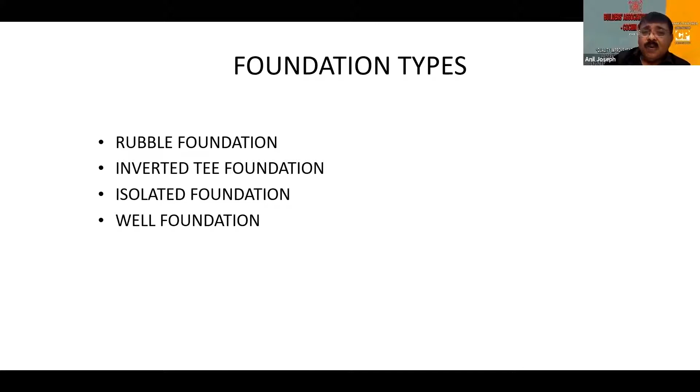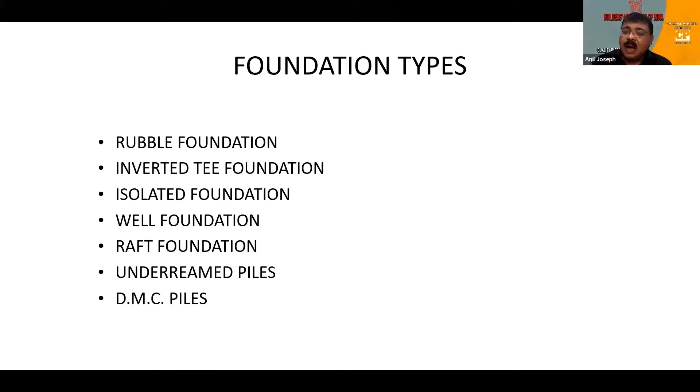As young engineers, you should understand that cost is a very important factor once you come to field practice. So this is isolated foundation, then we can have well foundation, raft foundation, underream piles, DMC piles. For a building there are different options - it can be for a single story building, a 20-story building, or a 40-story building. What foundation is needed? As an engineer, we should have an idea. We should not go into detailed aspects, but we should understand that for this building, in this area, what should be the foundation and what will be the approximate cost. That is an important aspect you should know.

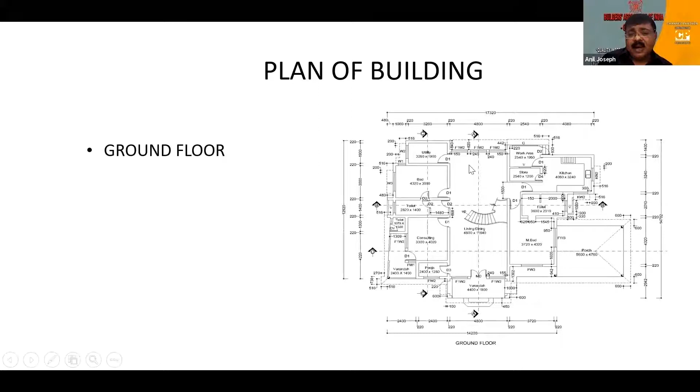So I'm taking a typical project, a small building. This is the ground floor plan, about 1,500 square feet, and a first floor plan, again 1,500 square feet area. So this is the building. In this exercise, what we are going to do is take this building into different soil conditions, with all other factors remaining the same, and understand the impact of the type of soil on the cost of the building, because it's a very important aspect.

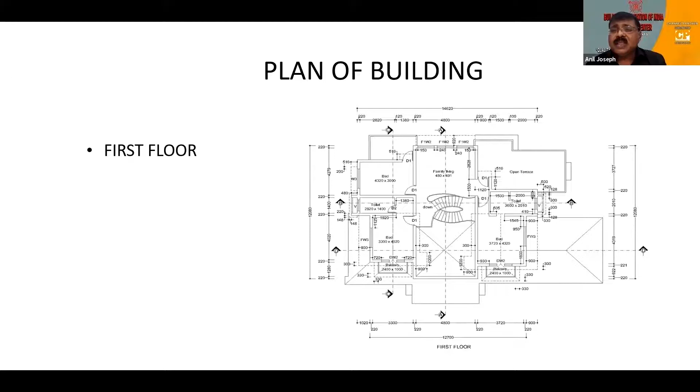Tomorrow, a client comes to you and asks what the cost will be. You should have an approximate idea of what the cost is going to be. This presentation was done quite some time back, so we might have to change the numbers a bit.

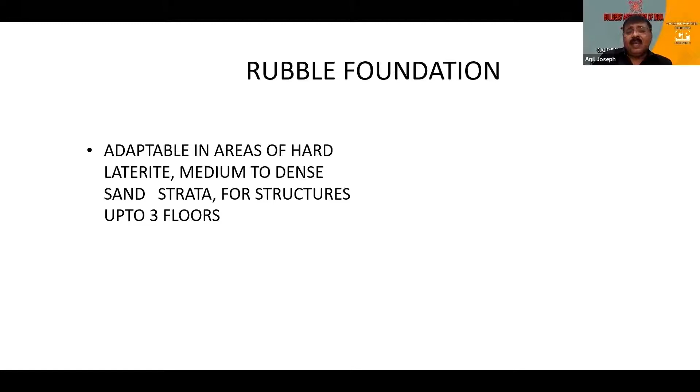Now, the common foundation we are adopting is the rubble foundation. Most of you know there are laterite foundations as well as rubble foundations. Generally, for conventional load bearing walls up to 3 floors, you can go for this system, provided you have hard laterite soil or medium to dense sand strata.

Up to 3 floors you can go for that, and you have a PCC at the bottom, and the width of the rubble at the lower level reduces as we go up, which is the minimum required for load transference. I can tell you the concept, because this 60 centimeter relates to your bearing capacity value.

Suppose for a 2-story building, you should have a rough idea: it will be approximately 6 ton per running meter as the bearing capacity needed. That will be the load coming from the foundation, the wall load, and the slab load, plus the first floor load and slab load. So approximately 6 ton per meter will be the running load coming from a 2-story building, so you should have a bearing capacity of 10 ton per meter square or higher.

You can go for rubble foundation. When you get hard laterite, you get a bearing capacity ranging from 15 to 25 ton per meter square. If you have dense sand with SPT greater than 20, you get this bearing capacity. So this is the criteria when you get a soil investigation report.

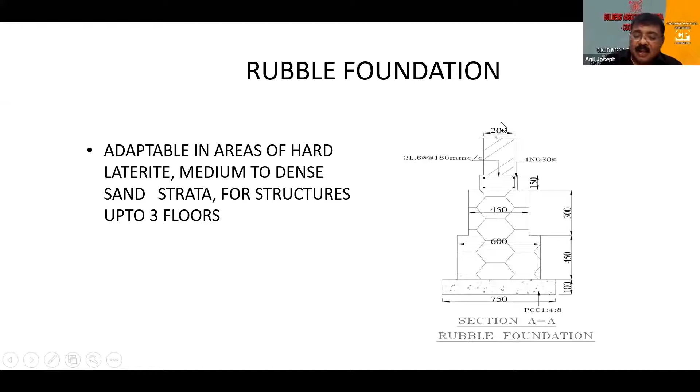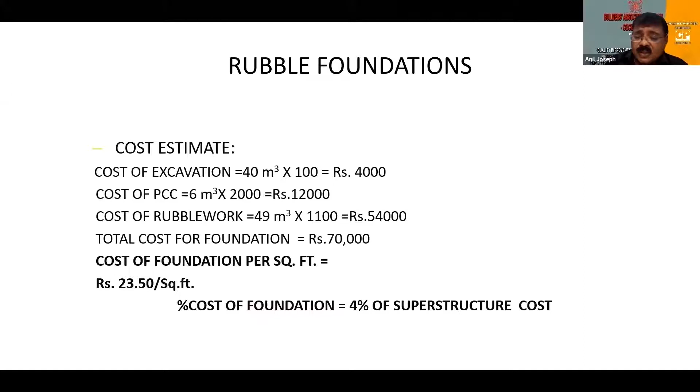So this is the simplest foundation, and what is the cost? Approximate cost of this building - suppose the cost of foundation includes excavation cost, PCC cost, rubble work cost, and the total will be approximately 70,000, which is about 23.50 rupees per square feet, or 4% of the superstructure cost. The superstructure cost remains the same. So if you have a very good strata, your foundation cost will be only 4% of the superstructure cost.

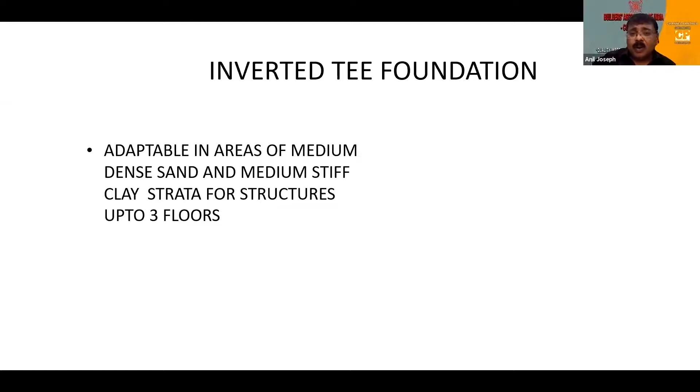Now the second option is that you are not very sure, the values are a bit lower, then you can go for an inverted T foundation, because small gaps can also be bypassed. It is adaptable for medium dense sand strata, medium stiff clay strata, and for structures up to 3 floors. We call it wall foundation because the load gets transferred directly into the soil beneath and dissipated in the entire area. So it is advisable when you are not sure of the soil type below - either rubble or inverted T foundation.

Nowadays we find very few skilled laborers to do rubble foundation, so in most cases we go for inverted T foundation. You can see a 75 centimeter width slab, and a beam will be inverted on top of that. Over that, rubble work will be done and a belt will be provided. A DPC layer will be provided on top to prevent dampness from getting into the wall - a very common problem seen in many houses, including your own.

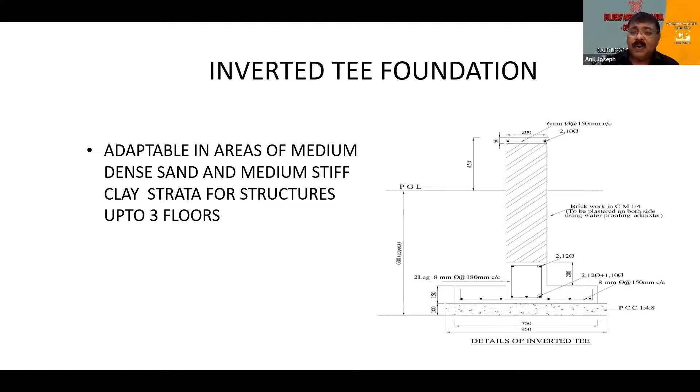If you have a close look, you can see that on the ground floor, the peeling of paint happens because dampness shifts from the ground level due to capillary action and gets into the wall. That is why we need a DPC layer to prevent that. This can be done up to a 3-floor building.

The cost for this will be approximately 10% of the superstructure cost. We worked out the superstructure cost at 600 rupees at that time; now it might be about 900 to 1,000 rupees per square feet for constructing the building. So you might have to spend about 100 rupees per square feet for an inverted T foundation at the current market rate - earlier, on 600, it was 56 rupees per square feet in the detailed working.

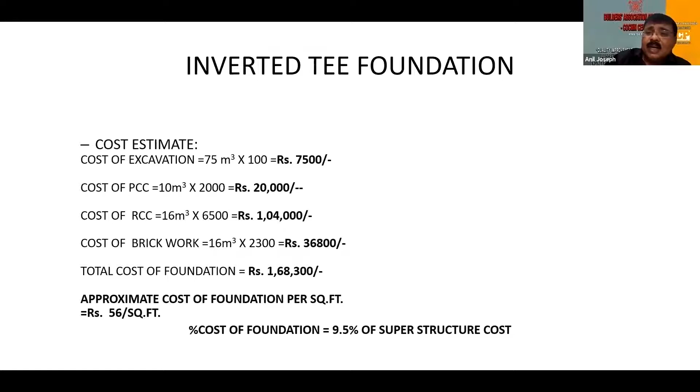The idea of this concept is that you should know, if you are going for this foundation or that foundation, what the cost is going to be. And again, the decision has to be based on the type of soil present in that particular area.

Now coming to isolated foundation - suppose we don't have good soil on top, so you cannot distribute the load across. Then you dig deeper, say 3 meters or 2 meters, until you reach good strata, and you put an isolated foundation where the load gets dissipated into that particular strata. This can be used for hard laterite or medium to dense sand, and even for multi-story buildings you can go for isolated foundation.

So there is a question we generally get asked - what sort of foundation is required for a building, suppose a 5-story building? Our answer generally is that it all depends upon the type of soil you have.

For a security cabin, certain times we have to go for under-reamed pile foundation or a deep pile foundation based on the type of soil you have. And sometimes for a 25 or 30-story building, you can go for isolated foundation.

So that's a concept you should understand, and that is the beauty of geotechnical engineering, because it's like an art, not a defined science. It's like making a painting—the more you do, the more skilled you become, and certain times soil surprises us. The father of soil mechanics, Karl Terzaghi, says that soil is such a beautiful element. It varies horizontally as well as vertically, and the many theories we study are only applicable in the book—we cannot convert it into site unless you have the art of understanding the behavior of the soil. The process of understanding soil is like maturing like a wine over the years.

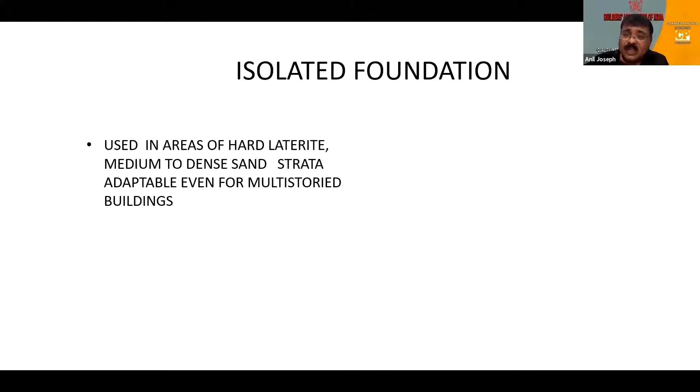So the more you do, the more experience you get, and as time passes, you learn how to interpret the soil—for isolated multi-story buildings as well.

So this is the typical isolated foundation. You can see what will be needed for that building, and you can have small columns to take care of that.

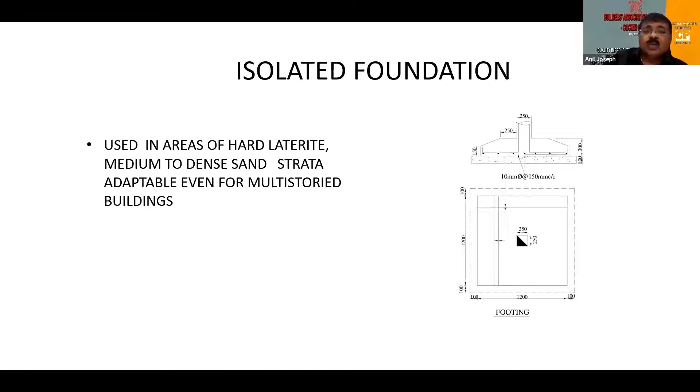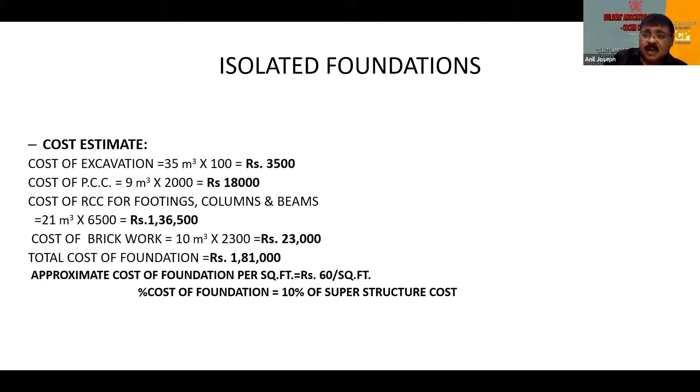Nowadays we provide struts in order to make buildings more earthquake resistant, so this will be more beneficial in that case. The approximate cost will be about 10% of the superstructure cost. So suppose you are spending 600 rupees per square foot on your structure, you will have to spend 60 rupees per square foot on the isolated foundation.

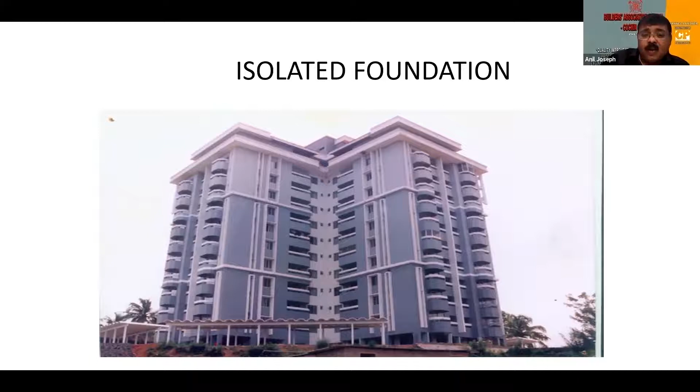This is a project which I did in 1994—I was the structural engineer for this project. This I have done in isolated foundation. It's the project for Bhagirath—at that time, Bhagirath was one of the senior builders. This building rests on isolated foundation on a hard lateritic strata.

So, well foundation—there are two different concepts of well. The actual well foundation is what we do for bridges, where we go deeper to the hard strata and found it there. Whereas for smaller buildings, temporary wells are available—rings available in the market. We take that ring and dig down to the strata we want, and do the foundation from that level.

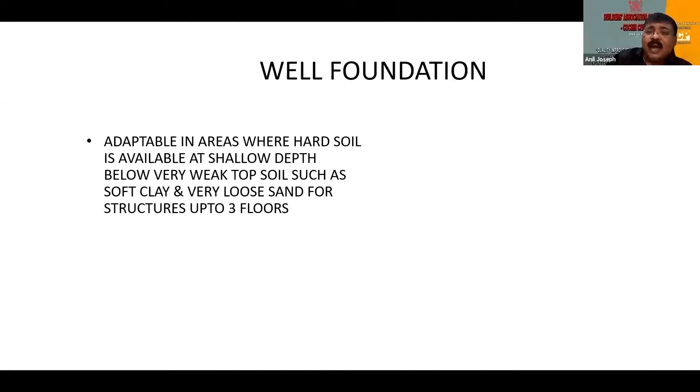Why is it needed? Where hard soil is available at shallow depth, below very weak topsoil such as soft clay and loose sand. Once we excavate, the loose sand and soft clay will start collapsing. So this prevents it from collapsing, and you can go down to the strata you need and construct the foundation—dewatering is also better. So it acts as a temporary casing.

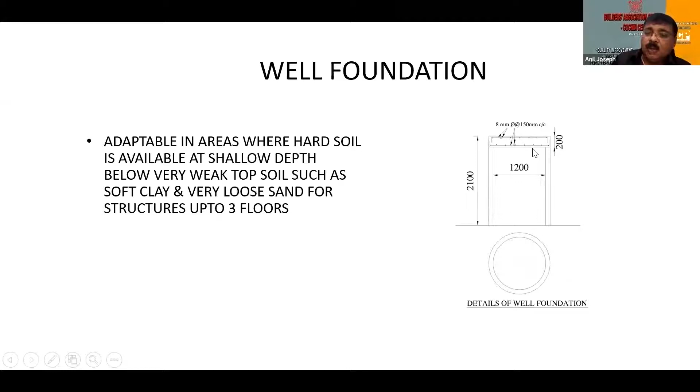Here you can see the photo of the well. There are different wells available—90 centimeter, 1.2 meter, etc. You go to the good strata, fill it up, or start your foundation from the bottom, put a capping on top, and then do your construction on top of that. Again, the cost will be 13% of the superstructure cost.

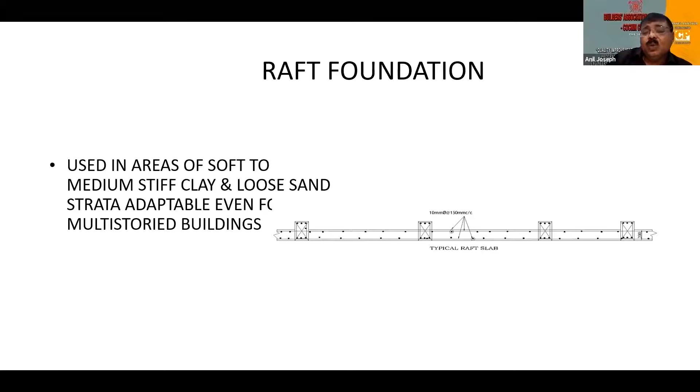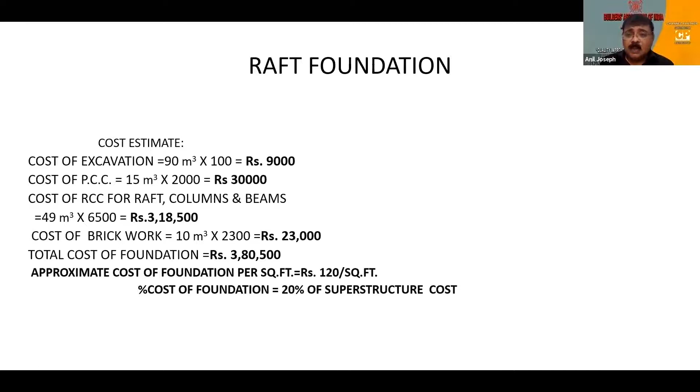And certain times, if the soil is bad and the bearing capacity is weaker, you go for a raft foundation—for soft to medium stiff clay and loose sand. When you go for a raft foundation, since there is a huge slab spread across the area, your cost jumps up to 20% of the superstructure cost.

There is also something called underreamed pile foundation. It's used where there is soft clay and loose sand strata, and the load needs to be transferred to a better founding strata beneath. Suppose you have good strata at 7, 8, or 10 meters—you cannot dig to that depth to have your foundation. So at that time we go for this underreamed pile foundation.

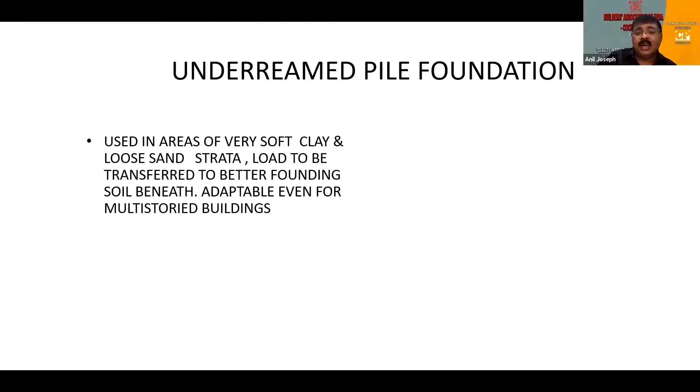In underreamed pile foundation, the benefit is that if you go down below, there is an underreamed bulb, and you can make a foundation below at this ground level, so that your load gets transferred from the top to the good strata below. Due to the friction as well as the end bearing happening, we are able to manage the foundation.

This is the underreamed pile foundation. It was developed by G.S. Jain from IIT Roorkee, primarily for black cotton clays in the Deccan Plateau, where they adopted it because of moisture variation causing problems in black cotton clay. So to prevent that, they came up with this. Now it has spread across India, and especially in Cochin, we use this underreamed pile foundation for residential projects.

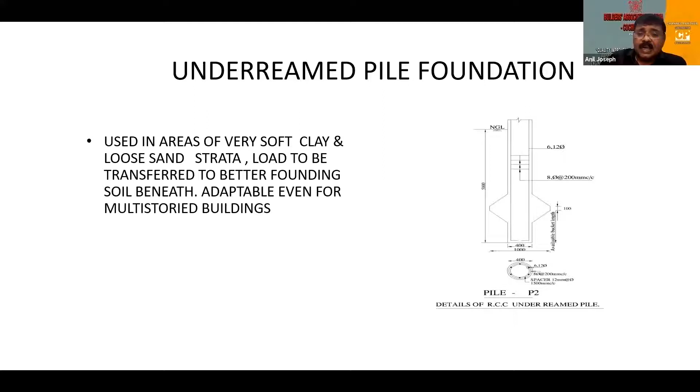If you go for underreamed pile foundation, the cost depends upon the depth of soil where you have good strata. Suppose it's 5 meter strata with good soil, the approximate cost will be 12% of the superstructure cost. In the same plot area, suppose just in the adjacent plot the soil is weak and you have to go for a 10 meter foundation.

See, the cost jumps from 12% to 17%. So you have twin houses, one plot with good soil at 5 meter depth, the next plot with good soil at 10 meter depth. You do underreamed pile at both locations, same structure, but the cost jumps by 5%, and that's a big number when you do a villa project of 40 or 50 units. That is why a lot of economics and viability of a project depends upon the foundation you adopt.

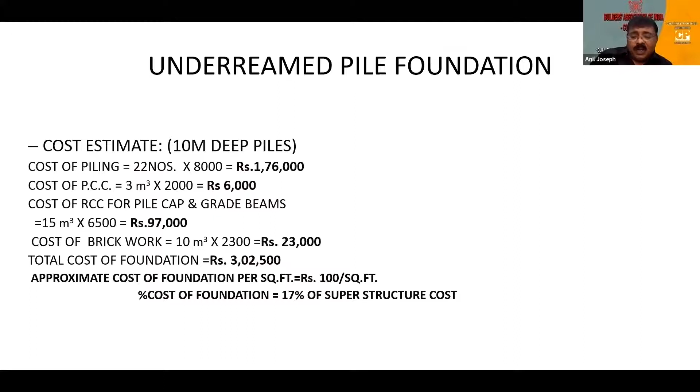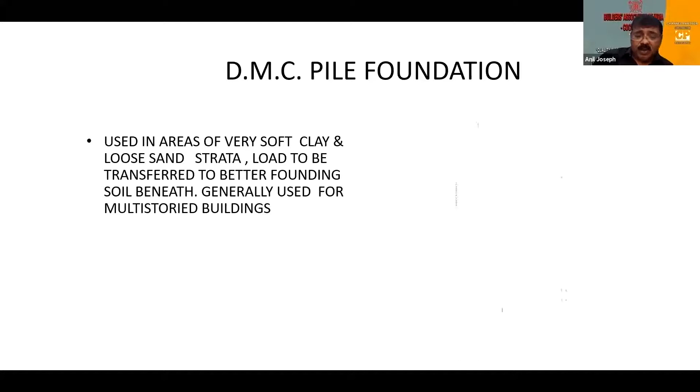This is called DMC pile foundation, DMC meaning direct mud circulation. What they do is circulate a chemical, either bentonite or a polymer, from a pump, which prevents the collapse of the sides. You bore to the required strata, recirculate that, then put the reinforcement, put a tremie pipe, and do the concreting. That is the DMC pile foundation used to transfer heavy loading in our area. Even for multi-story buildings and complicated projects, we go for DMC pile foundation.

So what happens? The cost jumps to 30% of the superstructure cost. We've seen that if it's only 25 meter deep and you have good soil at that depth, your cost for the same building jumps from 4% to 30% of the superstructure cost. That is the major impact.

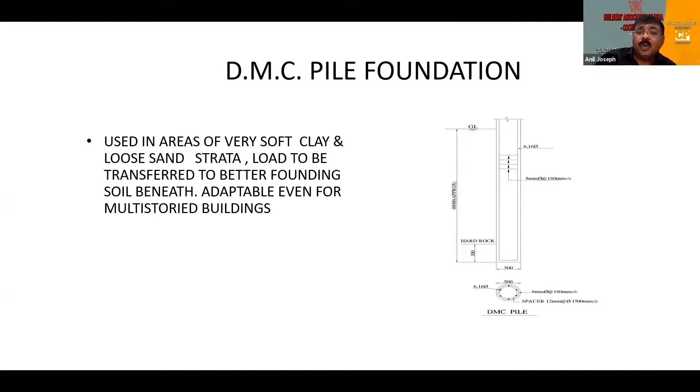And if the soil is extremely bad, like in Panampilly Nagar or in Kaloor area where the soil is extremely bad, you will have to go up to 40 meter depth and your cost is going up further.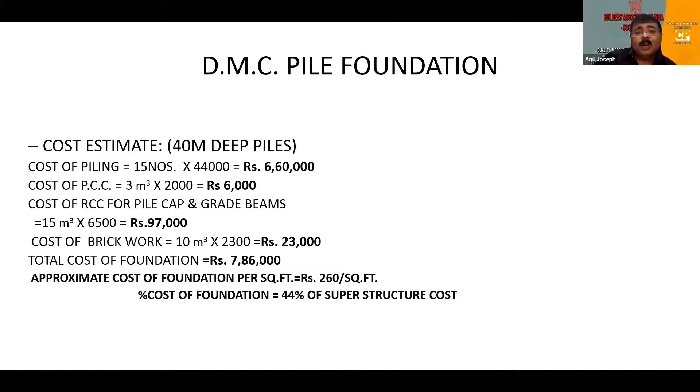So now we just changed the type of soil, and we found that if we had good soil, we were supposed to spend only 4% of the superstructure cost, whereas if it's very bad soil, we will have to spend up to 44%. So it's very important before you select the plot for construction to understand what the soil is there and what the cost impact is likely to be. See the difference - from 4%, the same building has gone up to 44%, only because the soil is bad.

This is a cost comparison for DMC pile foundation, an actual case study we have done. It was for a G+9 story building, designed by somebody from Bangalore, and the cost of piling for their design going up to 50 meter depth was 82,50,000 rupees, which was 118 rupees per square feet, needing 110 piles. We redesigned it, reduced it to 40 meter depth, worked out the capacity, increased the number of piles, increased the diameter, and our cost came to 69 lakh. So you can see the impact - we didn't change anything except the founding layer and strata, and reworked the concept. The cost saving was 13,50,000 rupees.

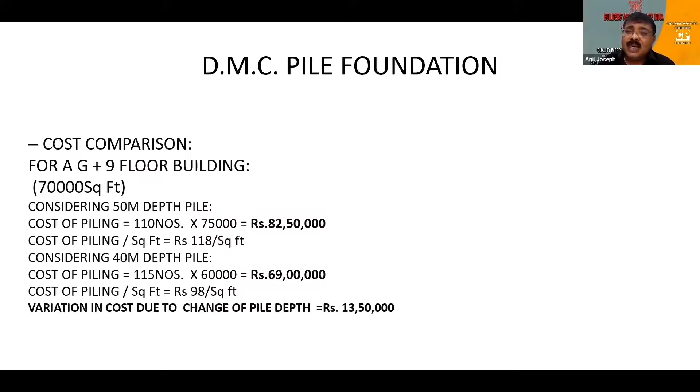It's a very important aspect when we do proper engineering and study the soil properly. That's why it's very important to have proper soil investigation data. I have seen over the years that people are willing to spend crores of rupees on things, but are not ready to invest in investigation to understand how the cost can be optimized. So it's a very important aspect which we need to look into.

Now coming to that, which is a tagline I always like to share with the young engineering fraternity: if it is worth building, it is worth testing. Our engineering has to be properly understood, and the behavior of the soil has to be understood to come up with the correct solution.

So how can we do this? First, you do a trial pit. See what is the soil below, take a rod, hit it, and understand what is the soil beneath, and then take a decision. Trial pits on all four corners and the center will give data on whether the soil is uniform or not.

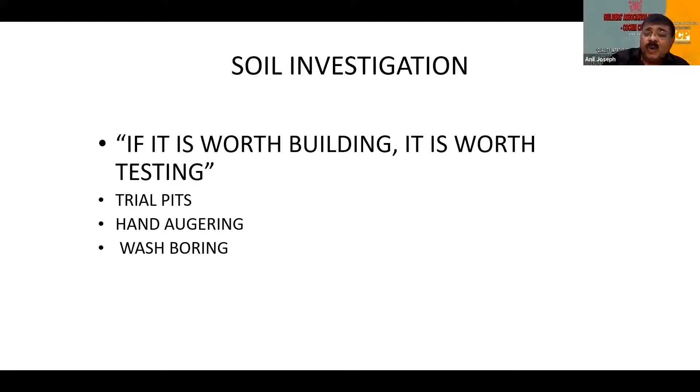Then you can do hand augering to take the sample and understand the soil beneath so a decision can be made. Then we have the system of wash boring, where water is pumped in and samples are taken out to understand the type of soil beneath. Then we have rotary drilling, where you drill below, remove the soil, and collect samples at different levels to understand the type of soil and come to a decision.

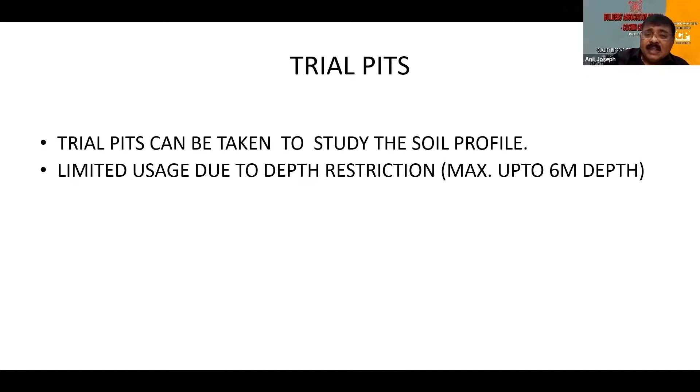Trial pits can be taken to study the soil profile, but there is a limitation: maximum up to 6 meters we can go. It's useful in laterite terrain, especially where you have good laterite terrain, but in many cases the laterite stones might have been taken off and refilling might have been done.

Before you start, I have come across 15 to 20 projects where they brought in all the rubble and then started digging, only to realize it was a laterite pit. It's a very small elementary mistake, but in my 20 to 25 years of career, I have seen a minimum of 20 cases where they brought all the material without making a trial pit.

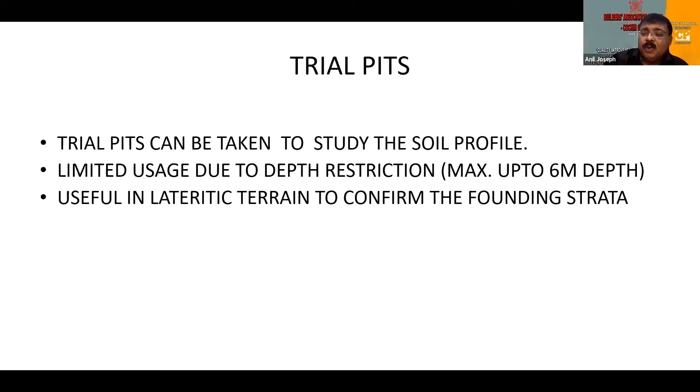So make a trial pit on 4 corners and at the center so you know what is the soil beneath. But people don't do that — they repeat the same mistake again.

Hand augering can be used in clay and sand strata, but cannot be used in rock strata. With an auger you can go down, drill it, get the sample back, and it can be done up to 35 meters. But generally, since it is manually driven, it is limited to 15 meters.

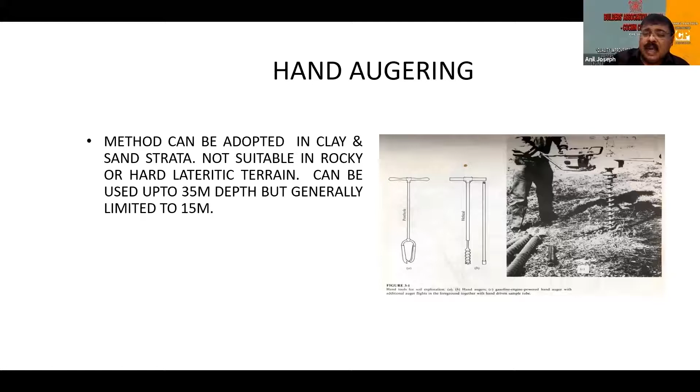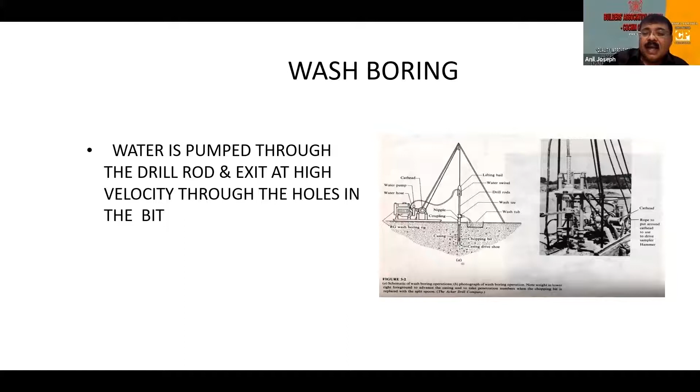In wash boring, water is pumped through the drill rod and exits at high velocity through holes in the bit, and the wash sample comes at the top. Rotary drilling uses a rotary drilling rig, with simultaneous application of pressure to advance the hole.

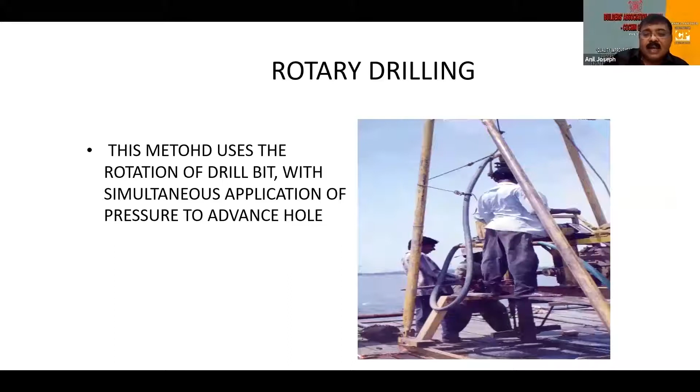Now the SPT test — what is SPT test? It's called the standard penetration test. It's a very crude concept where a 63.5 kg hammer is dropped from a height of 75 centimeters in free fall, and the number of blows for penetration of the split spoon sampler is recorded for every 15 centimeters: 0 to 15, 15 to 30, and 30 to 45 centimeters.

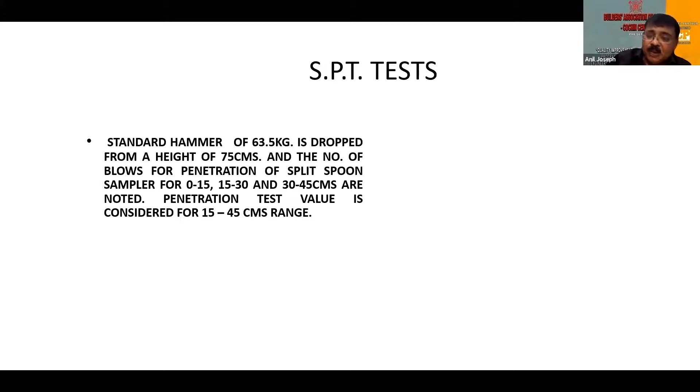We eliminate the first 15 centimeter reading due to disturbance in the soil, and the number of blows needed to penetrate the next 30 centimeters, using the 63.5 kg falling from 75 centimeters, is known as the SPT value. This is the standard penetration test value, and there should be proper guidelines.

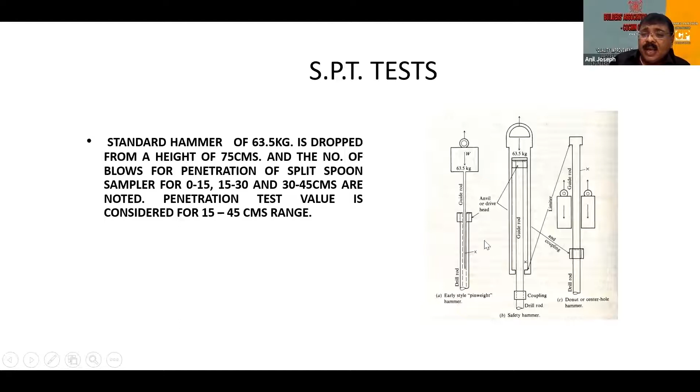When you are in charge of soil investigation, make sure the free fall of 75 centimeters is achieved — it should not be that we just drop the weight carelessly. It has to be properly marked, and there should be a guide rod to control the fall to the required 75 centimeters.

Then there is the dynamic cone penetration test, where a cone is placed at the bottom and a hammer is hit, and we measure the logging continuously to understand the strength available at different depths. The modified version is the static cone penetration test, where we have a pressure meter and apply force continuously to understand the cone penetration value throughout the depth of the strata.

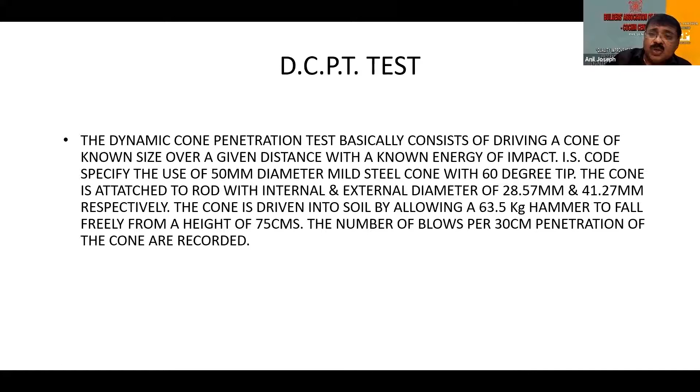So you have a continuous test when going for cone penetration testing, to understand the strength data at a particular depth. So these are the different tests which are available.

I would like to talk about a few laboratory tests which are used. One is sieve analysis, which we do to understand the grading of the soil which is going to come in. We also do a natural moisture content test to understand the water content available, and then the liquid limit test, plastic limit test, and shrinkage limit test. So these are the different tests available.

Why is it needed? If you get a sample from the site and do a sieve analysis, you will be able to tell whether it is sand or clay. The behavior of sand and clay are totally different, and that is the major variation in taking a foundation decision.

In sand, if a load is acting, the settlement happens immediately. Whereas in clay, it gets converted into pore pressure, and over the years it starts settling. This leads to tilting of buildings, and all the complications happen in clay soil because the pore pressure gets dissipated over the years.

Once we understand the natural moisture content, the liquid limit is the stage where the water content reaches the extent that the soil starts behaving like a liquid and starts moving away. If you understand the liquid limit, you will know at what water content the soil will start flowing away, and if it starts flowing away, there won't be any cohesion or adhesion to the soil.

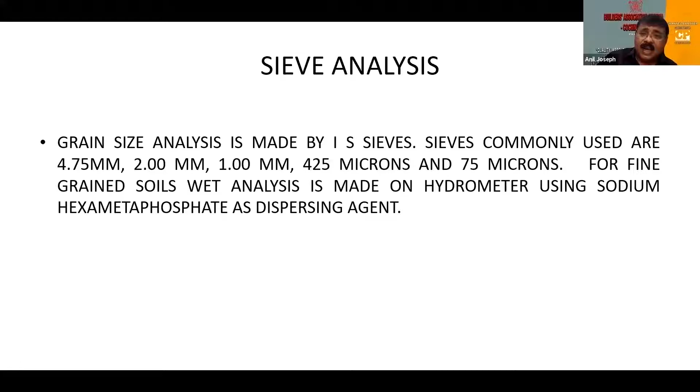In sieve analysis, if the particle size is above 75 microns, it's one classification; below 75 microns, it's called fine-grained soil. It can be coarse sand, medium sand, or fine sand, or it can be clay or silt. If it's less than 2 microns, it's clay, and between 75 and 2 microns, it's silt, and we do a hydrometer test to understand that.

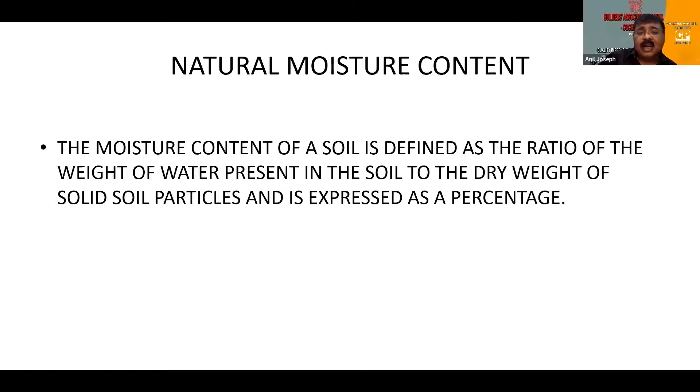Natural moisture content is defined as the weight of water present in the soil to the dry weight. Based on that, we work out how much void formation there is and understand the behavior.

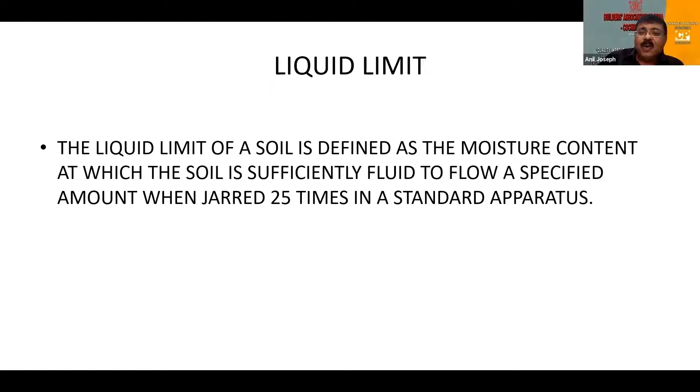For liquid limit, you might have done this test in college—you do it 25 times and note the moisture content when the groove joins together. But the field application is that once you know the liquid limit value, you can interpret how the soil is going to behave at the site.

The plastic limit is where the soil can be threaded into a 3mm diameter. At that particular moisture content, the soil starts behaving plastic, so friction is not going to happen. Based on that, you will be able to understand the soil behavior.

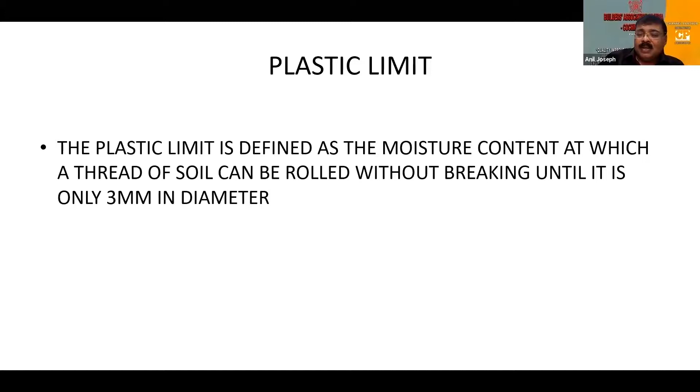Architects were there, and then it was given to the Singapore-based Jurong Consultants to do the detailed engineering. Jurong was the structural engineer on record. This is a property leased for 30 years, and when the foundation design came in, the budgeted cost for piling was 92 crores.

They told us you look into the design, but you have to save at least some money for us. We told them we cannot guarantee that. We will look into the design and tell you if it is over design, we will tell it is over design. If it is under design, we will tell it is under design. We will give our feedback. Finally, we had a lot of argument and settled for 3 lakh rupees.

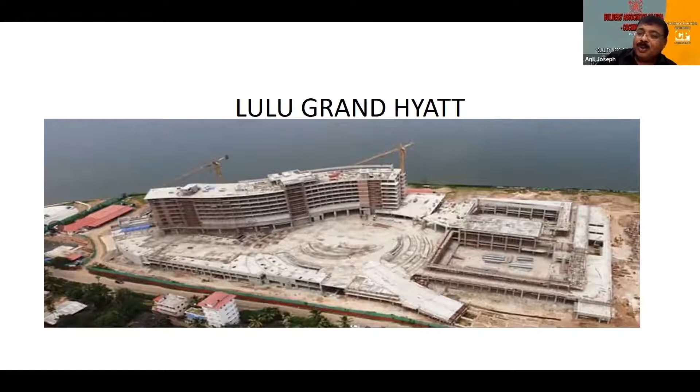Jurong found that it is better to put us as the consultant on the job, and we ended up getting fees almost 50 times higher, about 25 times higher than where we started with. So that is the importance of giving value. So the fees for my young engineers is not dependent upon your education, your skill set, but the value which you give to your client. So the money is related to the money they are making. If you are contributing to the project, if you are passionate about your project, that can make a big difference.

You should have, as young engineers, don't be worried about the money you are getting now. Get your experience, get your knowledge, so that when you talk, it counts. And when you make a difference to the project, it matters. So if you can come to that level, you will be respected, and there will be payment given to you based upon the time or energy which you are putting and the value addition you make to the team.

So that is where the cost goes up. I know people who are collecting 1.8 crore package sitting in Cochin, much higher than what doctors get with a civil engineering degree. So it's all about what you know and what you do.